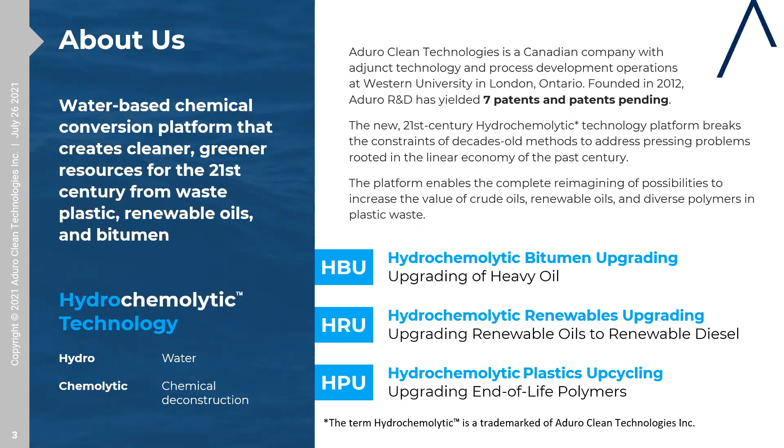So a little about our story. As you can see, we've been very active over the last 10 years in advancing our technology. We took the initial bitumen research to Western University and advanced it through a series of experiments, initially to perfect bitumen upgrading aspects of the technology, then took a look at the possibility of using other feedstocks as ingredients in our process. Through that research, we developed pathways for renewable diesel, biojet type fuels. This led us to submit patent applications on renewable and vegetable oil-based fuels.

In 2018, we again sought to change to a different feedstock. This included rubber tires, plastics, polymers. Our success here demonstrated that we had developed a comprehensive chemical conversion platform with potential for very broad applications.

In 2020, we took our research out of the lab and are now in the pilot stage. We've moved our operations to Sarnia Lambton Research Facility and are setting up our R2 unit. This is our first milestone that you guys have been hearing us talk about. This is a continuous flow process unit that we are going to demonstrate bitumen upgrading on.

This represents a decade's worth of work, nearly $4.5 million worth of both equity, time spent, friends and family rounds of funding, and indeed, as you can see, many grant applications through NSERC, OCI, BiofuelNet, and then collaborations with Western, Greenfield, and more recently in the Western Sarnia Research Facility with BIC, the Bioindustrial Innovation Canada.

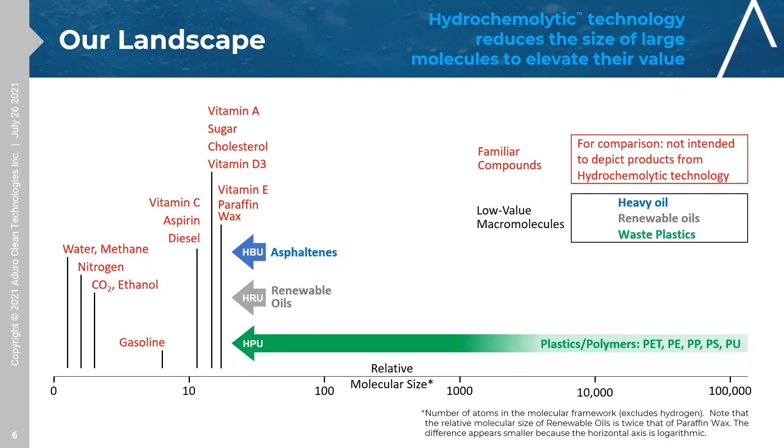Renewable oil is something that society has been working on for the last 30 years or so, that shares the same characteristic. And recently plastic has been overwhelming us, but it's human-made polymers or molecular chains that are engineered in many ways and really, really hard to deconstruct.

So what's the challenge? Over the years, there were maybe three approaches or concepts to solve those problems. Of course, we're coming from what we call the linear economy, where things were available in vast quantities, and we simply use them and dump them.

For many years, we did the minimum, and the minimum would be just a landfill, or we reuse plastic by blending, or sometimes did some mechanical breakdown. That means we try our best not to add cost into it and just do whatever we can after using it to solve the problem.

In today's time, society has much less stomach to deal with it, and is really looking for solutions to reduce the size and footprint of landfill. In addition, today we tend to see those landfills as assets. In other words, there's a vast amount of hydrocarbons that are there that we could use. The question is how we can use them.

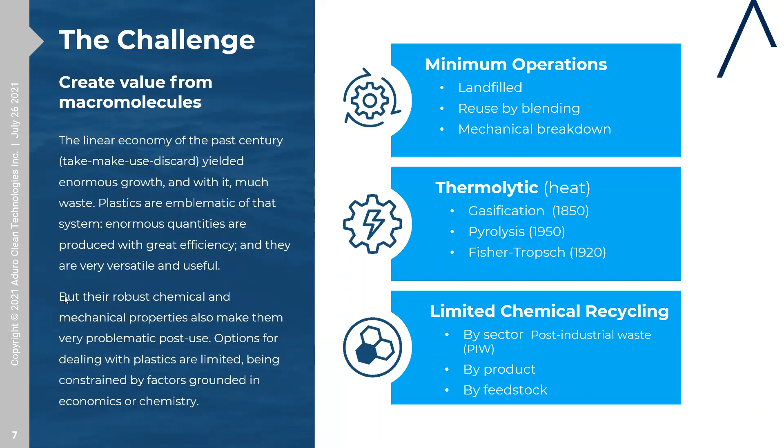So again, this is on a broad scale, items associated with certain realities coming from bitumen, plastics, and renewables. Often what you'll see, because of the issues I discussed before, efforts to process macromolecules on a large scale, and because you have to suck every cent out of it, you end up with high capital costs. You're bound to do large scale operations, you have to deal with byproducts, and you have high energy intensity. When you have high energy intensity, things happen - you're essentially burning it, though it's not really burning, it's heating it to such an extent that you have to crack everything, and you have to deal with the emissions.

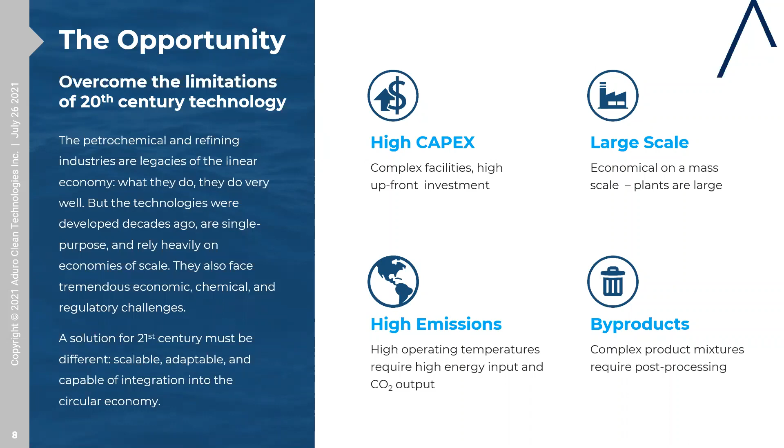If there's a technology that could reduce all of that, you can see the power of the opportunities. The petrochemical refining industry was relying on those activities for many years. I'll remind everyone that we are at an early stage, young in this case, but we're converting in a way that performs a chemical conversion, and for that reason we're significantly reducing all the above components. Hopefully we can show it to you as we move forward.

So hydrochemolytic - Abe mentioned hydrochemolytic. What it is, it's water-based, involving chemical deconstruction of complex macromolecules into simpler components. The difference is that when we do this chemical conversion, we stay very much with material, with molecules similar to the original material they started as when they were part of a major component. That's not the case with the thermolytic approach, and this is very different because it allows us to imagine opportunities to direct those molecules in different directions.

Hydrochemolytic is a deconstruction of macromolecules in diverse feedstock, and we do it by agency of water. In many cases we don't need other resources that are normally required in other approaches, because we're creating them in situ. Think again about the process - we're looking at the material from its chemical content, and we're able to build it up to our needs. In the waste, there's enough material for us to use and create reactions equivalent to reactions that save the need for hydrogen.

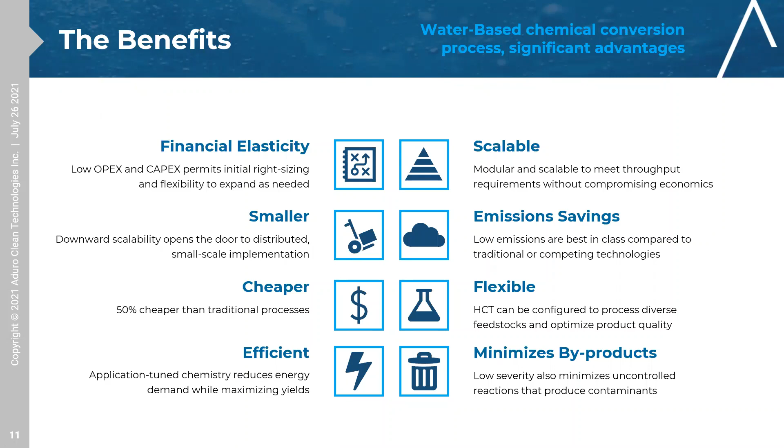Can you take all the plastics, most of the plastics, some of them, or do they need to be separated?

Yeah, this is a great question. Everyone is caring about plastic, and plastic is close to us. It's everywhere, all around us, and when we look at it, we know that there should be another way to deal with it apart from just burying it or burning it. This is a learning experience, so understand that the technology is fairly new, and there are things that are straightforward for us that we know we've already had huge success with.

By way of example, polyethylene. And we know, because of the chemical nature of polystyrene and polypropylene, that we anticipate somewhat of the same profound success. When you're talking about a mixture of plastics, for a minute let's take out PVC.

So in other words, in our work, what we're doing is subjecting each compartment in the reactor to reactions that we feel will only operate on the designated material. Overall, we can imagine operating on a mixture of plastics.

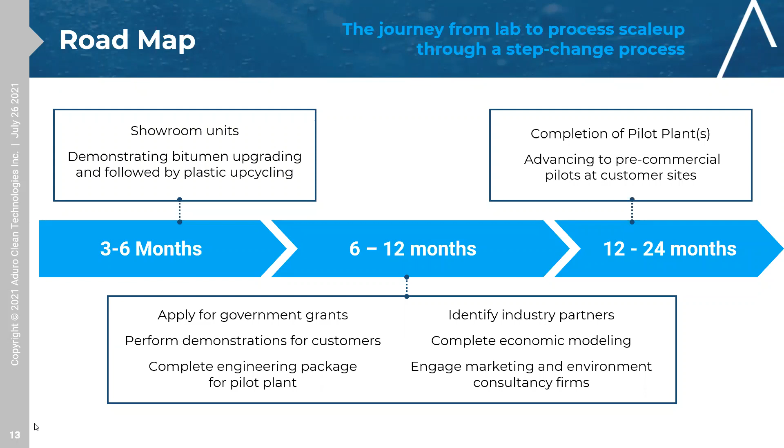That's a great question. So most of just think of it for a minute from the profound change that the technology could represent. If most of the technologies that we are talking about are somewhat pyrolytic or heat-based, then it implies a certain way of operating.

What you need to do is work on vast volumes, vast amounts of quantities, and then if the technology -- I'm not saying it's inefficient -- all hands down, you have to respect other operations. It's just limited by some chemical and economical realities that are coming to us today because of society and other issues. But you would see how they need to lock themselves into some kind of an offtake agreement and build massive projects in order to extract the economic value.

By contrast, this technology enables a lot of flexibility -- in other words, to provide solutions dedicated to a territory or to a customer. And the customer could be a small customer; we could maybe serve two or three customers at once. For that reason, for now, in the plastic area, we're not aware of it.

In the heavy oil area, we think there'll be different models, but in the renewable areas, they are not competitive -- there are technologies that are offered for licensing. There are different types of processing to produce ethanol, by way of example, and some of them are licensed -- just technologies that are licensed, but not directly, not right now.

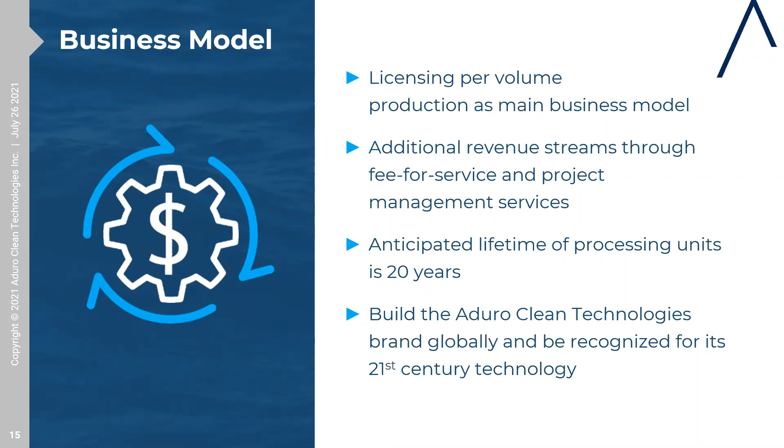We see growing interest from smaller size producers in this plastic space, and the reason is that some of them want to move away from the pyrolytic process. If you're looking into options to create some kind of circularity, you absolutely have to look into chemical conversions—everything else just doesn't give you the credit. So we have growing interest from organizations interested in that type of circularity, and we are investigating that path.

The petrochemical, the heavy oil market in Alberta is more of a 'show us, prove to us that this works' mindset. They've got scars on their backs from many years of efforts, so there's much more skepticism. At this point in time, we have to demonstrate the pilot before moving into further discussion. Those organizations have put so much money over the last 50 years into in-the-ground building capex, that if you're coming with something, you better come with all of the answers. They're waiting to see what we do.

Perfect. As far as the plastic recycling process, have you done any testing yet for the bromines and the various flame retardants contained within plastic products? Have you done any testing for that so far, or no?

Right now, at this point in time, we're looking at the families of plastics, and each family is breaking down differently. But overall, based on the families, and recognizing the families of polymers, we've done work on polyethylene. We're doing work now on polypropylene, and polystyrene is next. So it's a growing know-how, but the chemistry checks out, and we know what to do with it.

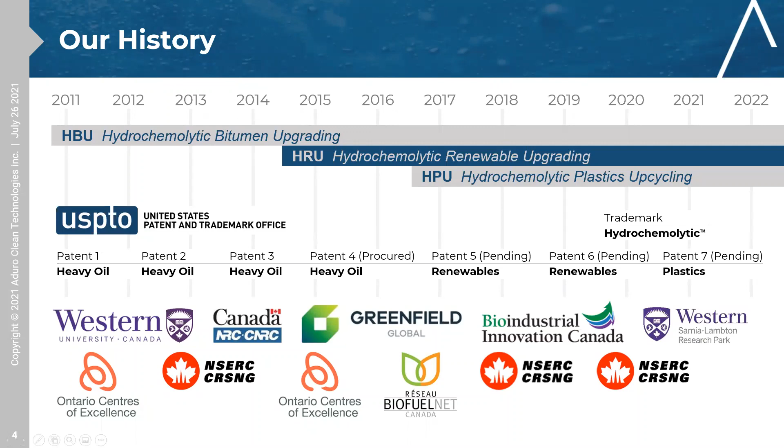I feel quite strongly that at this point the team we've built knows how to deal with a variety of issues associated not just with plastic, but with bitumen. I feel we understand it quite well, actually, to our spec—nothing else. We're not trying to dive into other technologies, but within our level there's a lot of know-how that provides optimism that we'll know how to provide solutions.

Perfect. As far as financial backers, can you speak to any of your financial backers, both private and public, as far as grants? In terms of financial backers, over the last 10 years, how has the company been funded? And going forward publicly, do you have any strategic finance partners?

For most of the time, we've been living by private investors, family and friends, and grants. I cannot speak highly enough of the government grants that enable guys like us to simply survive and stay off the radar. The equivalent of whatever we've done in the last 10 years in the lab—just as a statement and assessment—I would think anything nearby would reach well over $50 to $100 million in terms of research. That's what this amount has enabled us to do.

About a year ago, we met some really strong bankers who believe in what we're doing. I cannot say enough about those bankers. We're working very closely with them, and so far they've met every need we have, which gives us confidence that we could do pretty much whatever we need to do in the near future and be funded until we reach our milestones and beyond. The backers are very loyal.